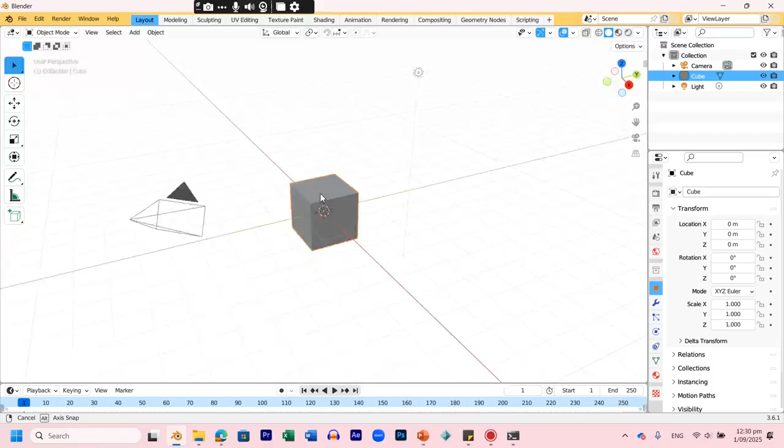Okay, so this is just going to be an introduction to the chess and wrecking ball project, and I'm going to go through this in real time in Blender of how you might like to approach this.

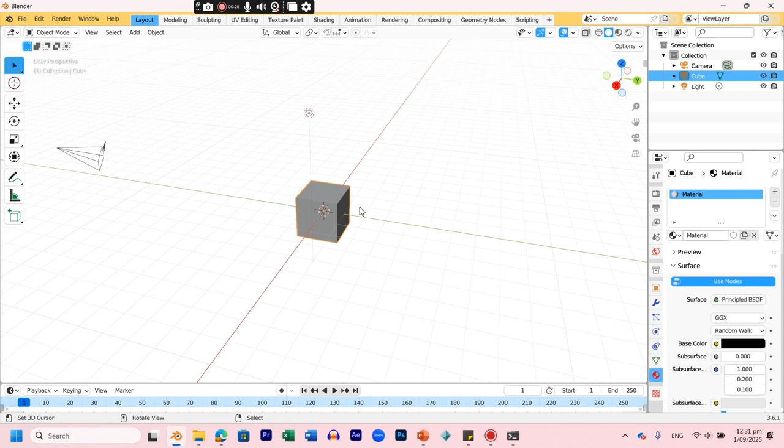You could actually start with the cube. To be honest, first thing we're going to do is change one into our color. I'm going to be boring and just go black and white. So this first one is going to be black. I can't see if it's black or white yet, but I'm in the wrong mode. But it is black. I'm going to look from directly above by pressing 7.

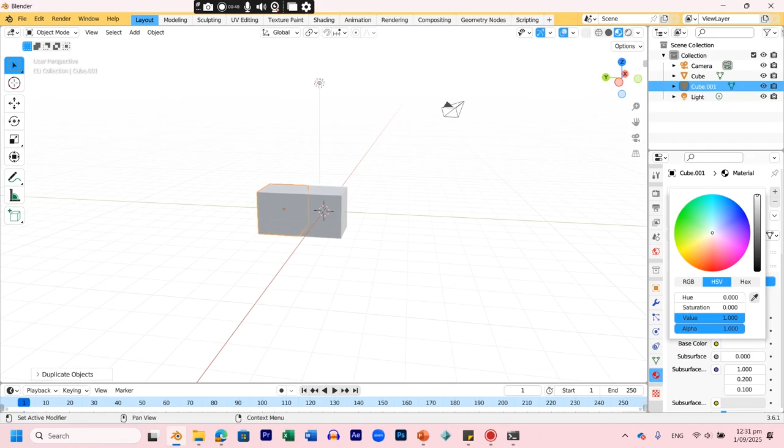Duplicate, and move in this direction, so it's just flush right next to it. Okay, so one's there, one's there. But this one I'm going to change to white. Now, if they change at the same time, it's quite easy to get rid of that - you just take that one off and then give it a new skin. There we go, one white, one black.

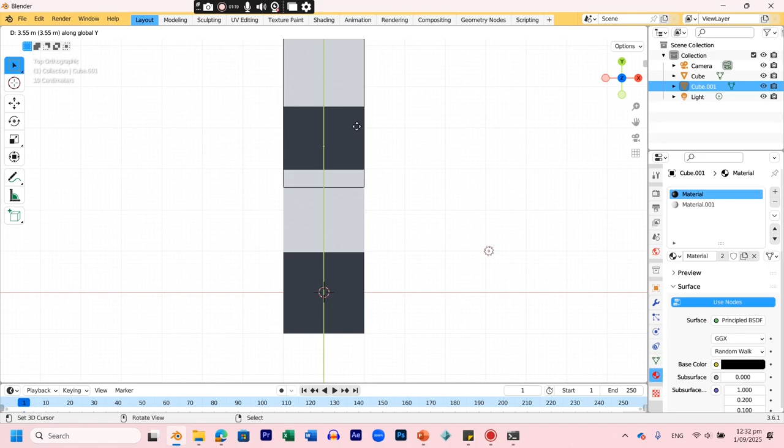Now, directly above, and all I'm going to do is join these two, Control J, or Command J if you're on an Apple, and then duplicate these two together, GY, just to move it very neatly in that dimension, and then join these ones, and then do that one more time, duplicate GY, and there we go - we've got a line, Control J, and that should be one solid object.

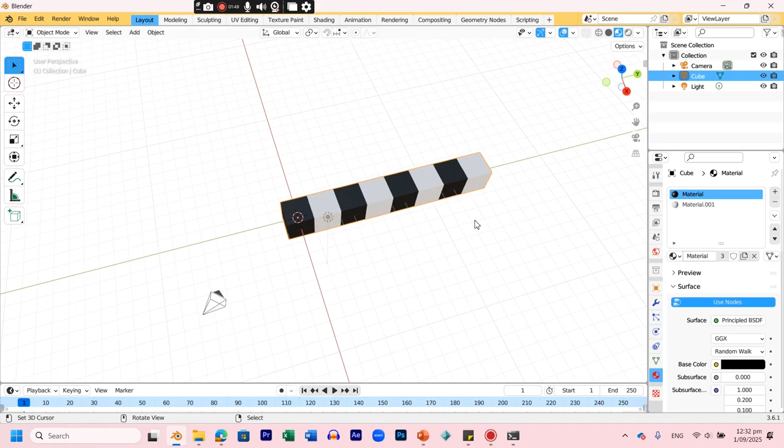Okay, now that's one side of the chessboard, and what I'm going to do is duplicate again. Oh, actually, one thing you can do - just looking from above, you see how this has got a center of mass right there. That's not really where we want it to be, so we're going to go Object, Set Origin, Geometry. There we go, that just moves the space to the center, which is what I wanted. We'll have to do that again when we're making the chains.

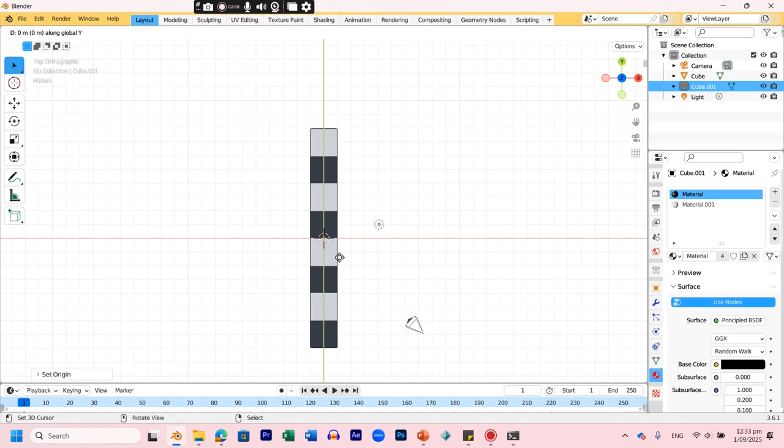And I'm going to duplicate this, and go GX - sorry, move it to the side very neatly. Now, obviously, white next to white, black next to black, that doesn't look like a chessboard. But because we start on black and end on white, it's an even amount of squares, which is 8. We need to go R180, and it's a checkerboard. I'm just rotating it.

Cool, join these two together, duplicate these guys, move this to the side, join those again, duplicate one last time, and we got ourselves a chess board. There we go. Now that's what I'm going to build everything onto. So that's my object - I could name this chess board.

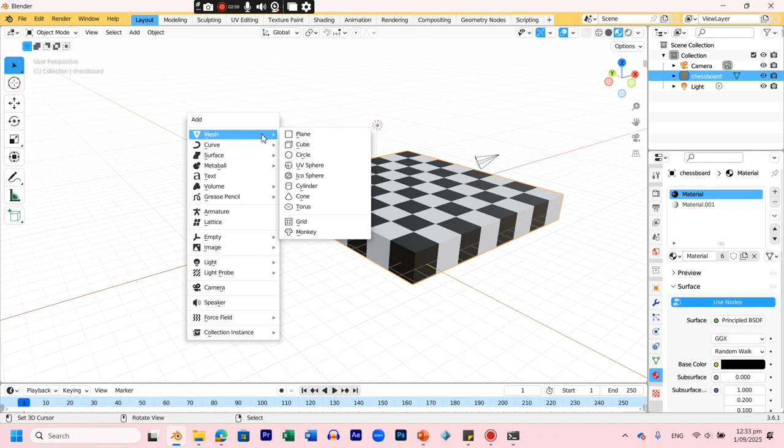And now I'm going to make my characters. So I'm going to start off with the pawn. I'm going to make sure it's the right size straight away, make sure it doesn't take up too much of the room on there. Perfect. Move it to the side and make it my center. Okay, now this is how we're going to make our chess pieces.

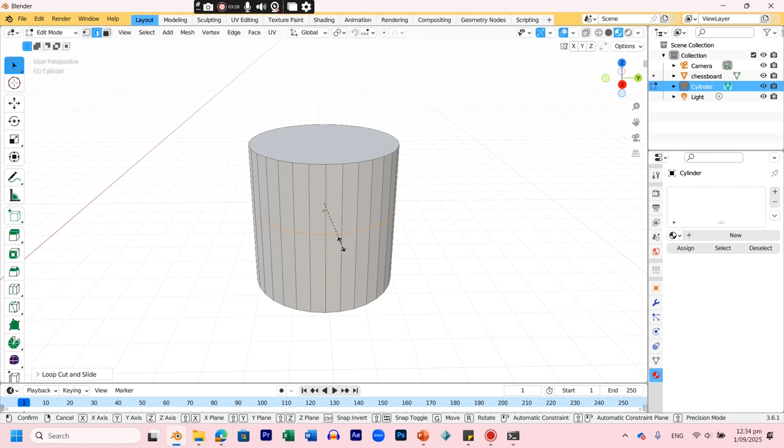We're going to go to Edit mode and go to Line. When we select the line, we're going to go Control R or Command R until we get this ring of influence. I'm going to click, decide where I want it, and change the size with S. Do this a bunch of times until it looks kind of fancy. Up to you how fancy you make them. I'm not going to go anything overboard, just change it a bit, just so it's a little bit more interesting than... there we go, that'll do.

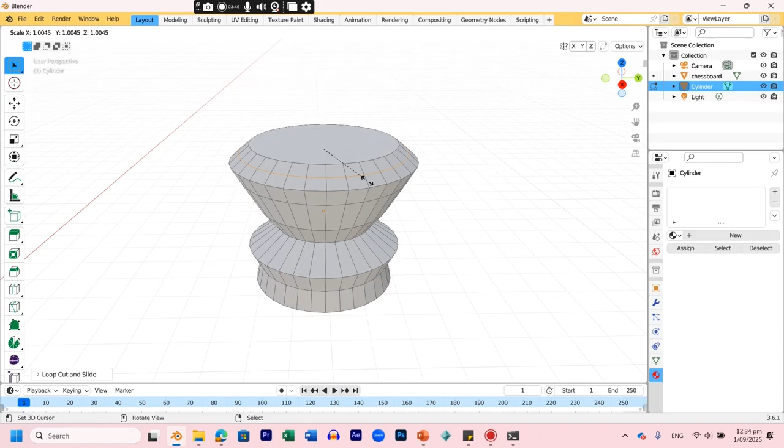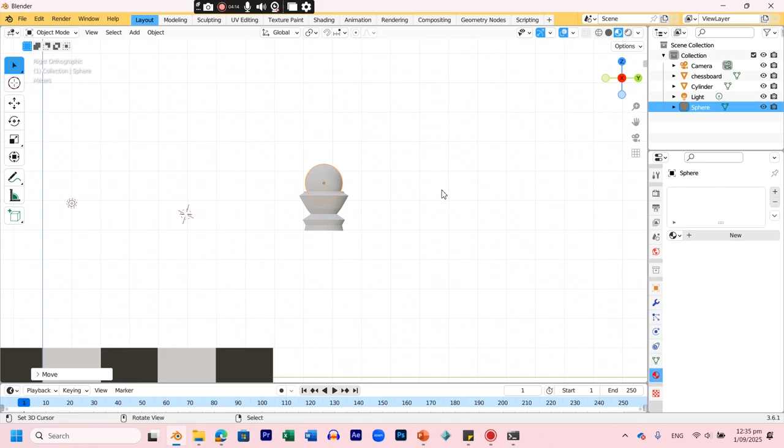And go back out of edit mode and into object mode. Look at it side-on by pressing 3. And I think I'll make a UV sphere, pop that on top and make it a bit smaller. Make sure it's directly above by pressing 7, and squish it down. Okay, let's have a look - does that look nice and neat? Looks pretty good. And then I'm going to join them, Control J - so that is going to be my pawn.

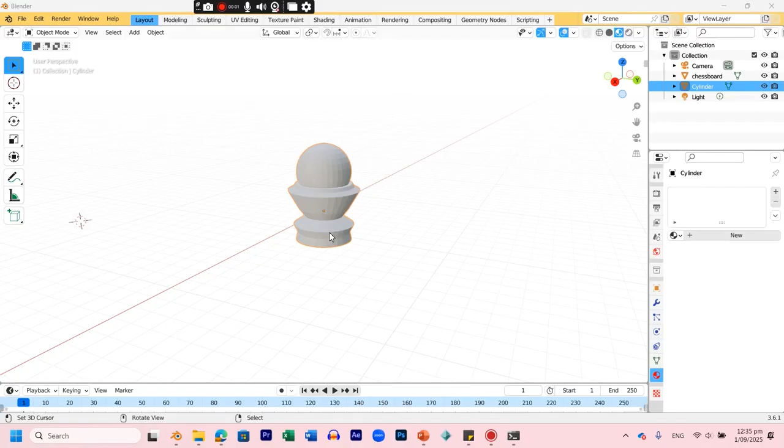Okay, so we're going to make a few more - we only need to make 6 shapes though, so that's a good start. So we're going to make a few more little characters here. I'm going to actually duplicate this guy, and in edit mode, go P to separate by loose parts.

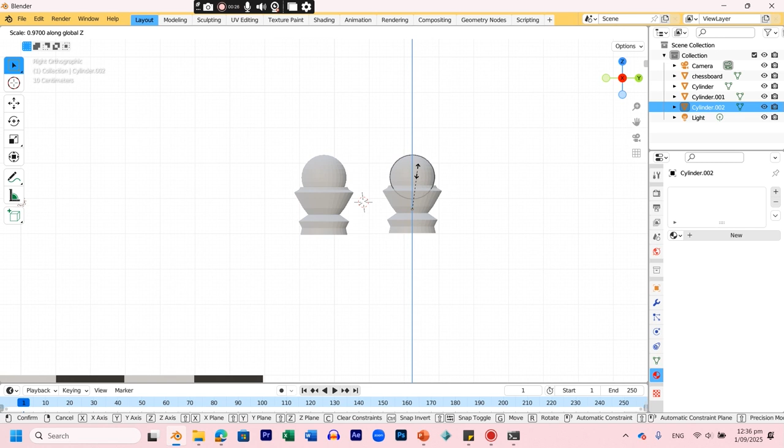And in object mode, I'm going to make this bit a little bit longer, so go SZ. I'm going to make another little blob on top, but this one's going to be very small. And this I'm going to make a little bit larger and a little bit longer, SZ. There we go. You can probably guess who I'm designing - it's the bishop.

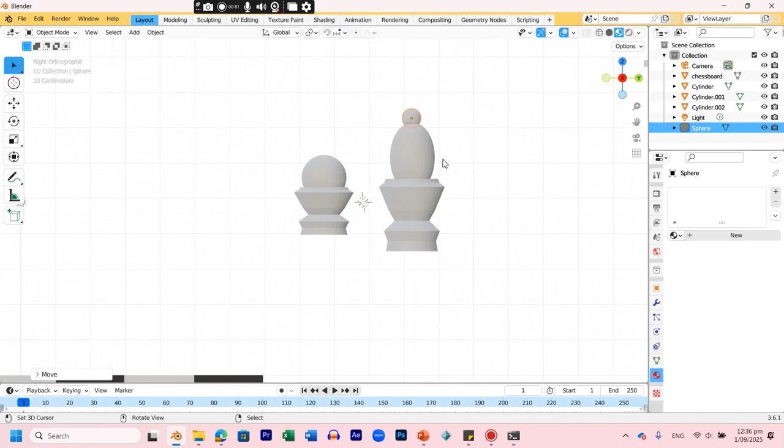Now what I'm going to do is use a different little trick with Boolean. I'll press S, Z until I make a little pizza box shape. That's good, just checking, and I'll grab it and put it at a nice little angle into the bishop.

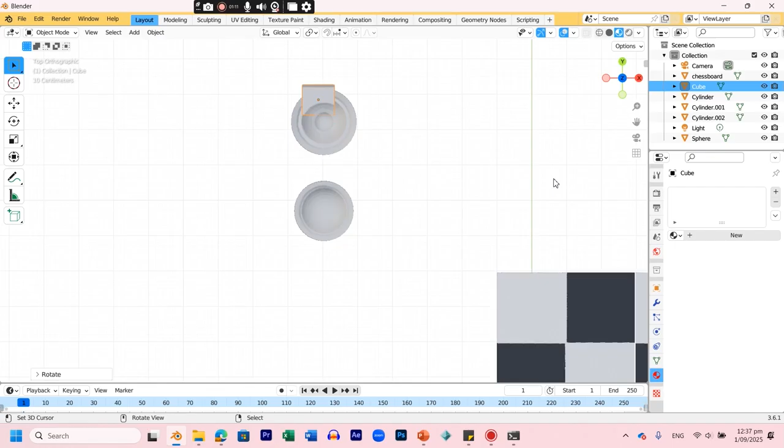Now I'm going to join all these bits together by pressing Shift and Control J. That's one bit. Then in the modifiers, I'm going to go Add Modifier, Boolean.

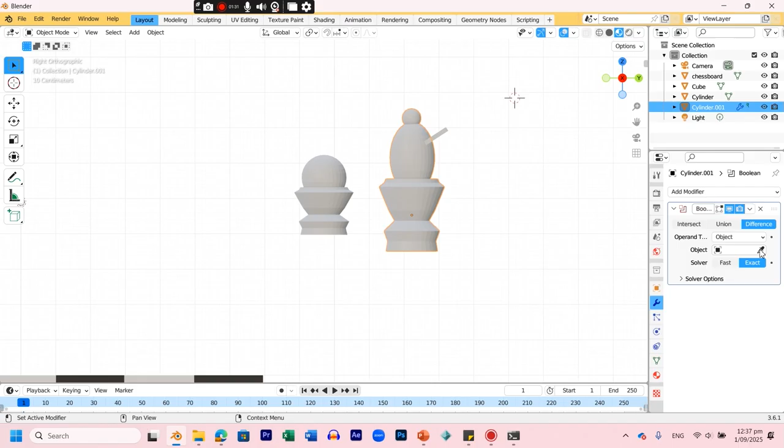So I'm selecting this thing I'm cutting, and then I select the thing I'm going to remove, which is this little object here. That's disappeared, but never mind, let's see what happens. Then I'm going to get rid of that, and I've got a little cutout. It also got rid of that little blob there, which seems to be a bit of a bug with the system, but I can fix that easily by making another one.

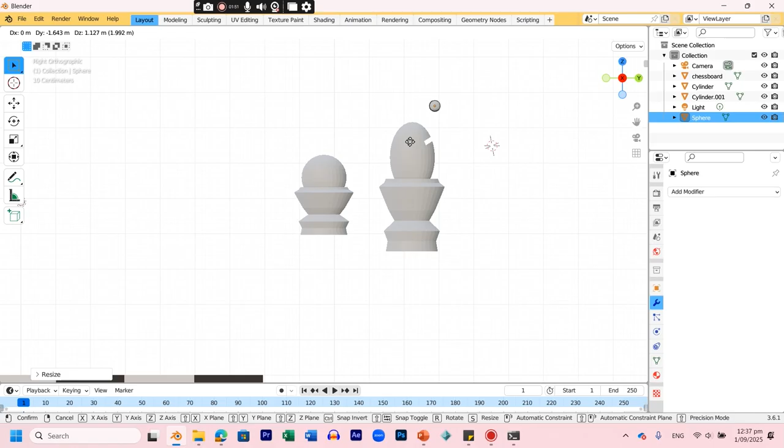So it's not a big issue. There we go, and then join it all together. And we've got a bishop. Now we need four bishops. Okay, let's make something else.

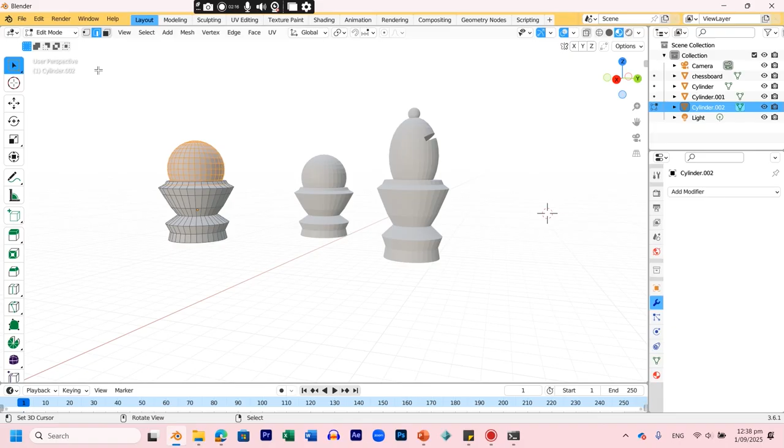I'm just going to duplicate this again and make it bigger. In edit mode, I'm going to press P, separate by loose parts. Then in object mode, that sphere is separated.

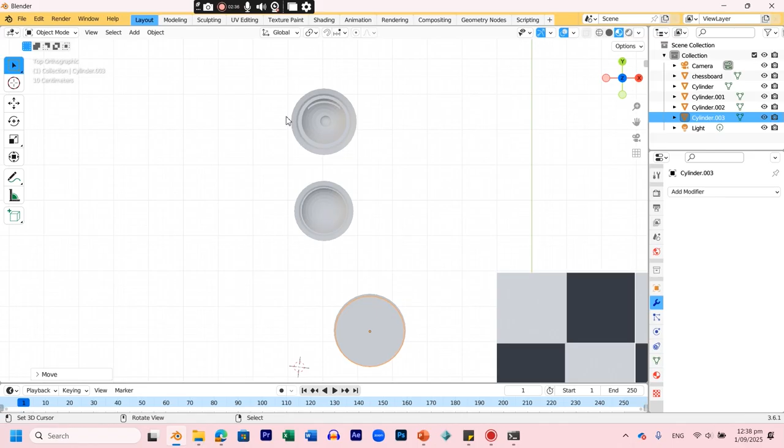Now I'm going to make another cylinder and pop it on top, making sure it's a little bit smaller. Move it down, maybe still a little bit smaller. There we go, perfect. I'm going to do the same thing I did when I started it off.

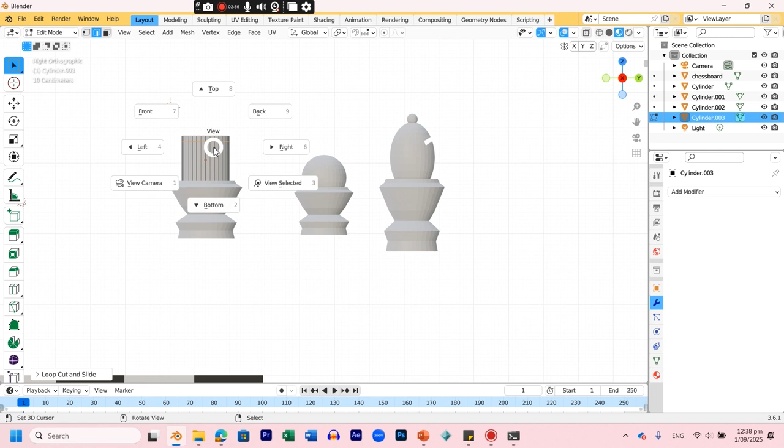So I'm going to go Control R, this right to the top, and put a little ring of influence there. Now it doesn't look like I've done anything yet, but I am, because then I'm going to go to face, choose the face, and make this small. You can probably guess what I'm doing.

Then I'm going to go D, Z, and move it down, kind of dragging it down. I'm only going to do it a little bit, and then do it again with S, Z. Is that going to work? No, I think I've got to make another ring.

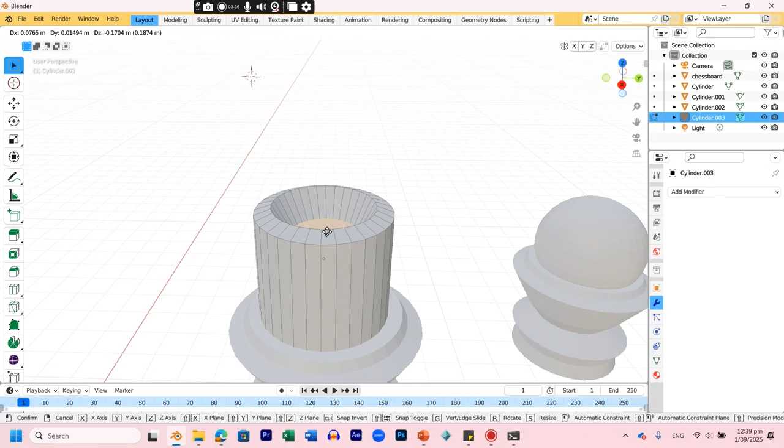And then, oh yeah, there we go, that's what I wanted to do. Back to faces, and then I'm going to move this down. Did I do that neatly enough? No, I didn't. There we go.

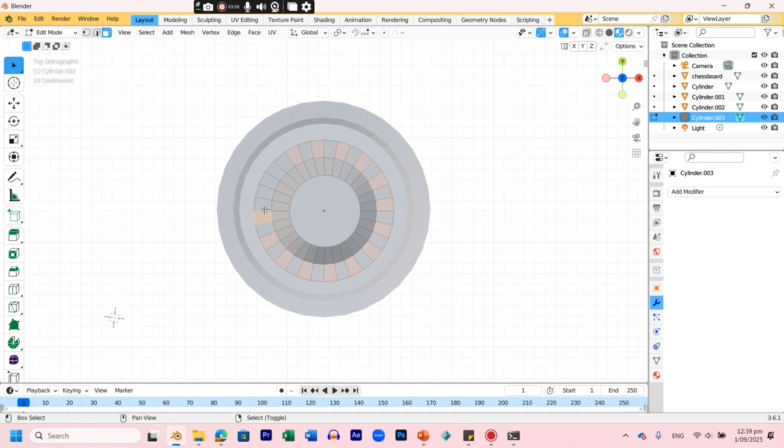Cool, now I'm going to make the rook. Looking from above, I'm going to use shift, selecting every alternative or every other space. Then I'm just going to go E to extrude and Z for the direction.

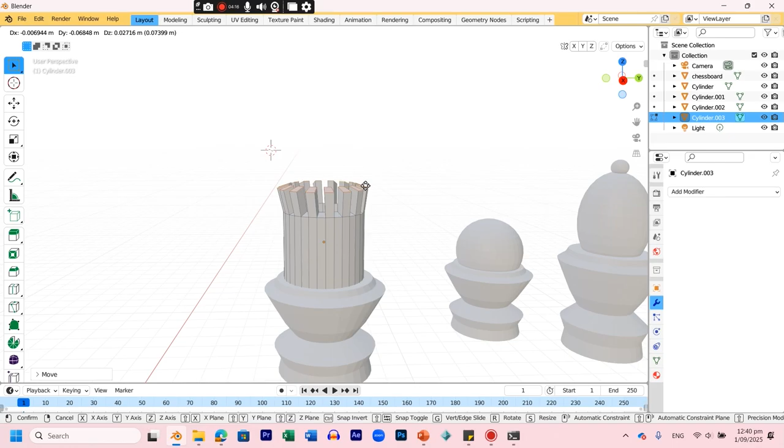I might just want to drag it out a little bit. There we go. Oh no, there we go, that's fine, it's a little bit wonky. There we go, there's my rook.

All right, I'm going to go back into object mode and join those bits. I'm going to duplicate this guy another time and make it even bigger. I'm just going to check that it's not too big for a second. Yeah, whoa, a little bit too big.

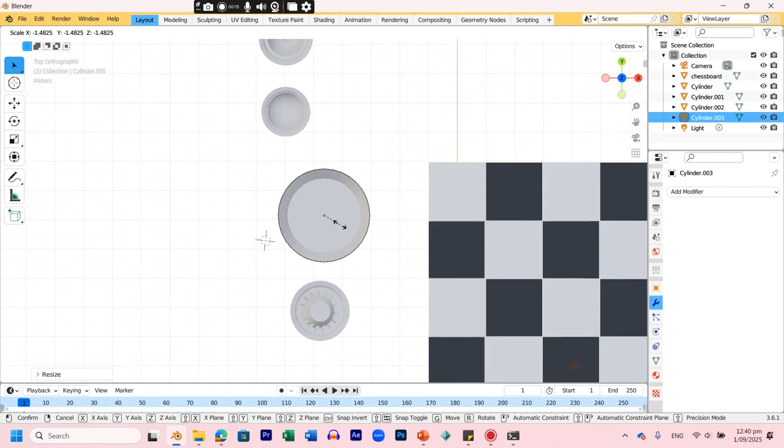Then I'm upside down, I want it to be... Actually, I might keep this guy the same size and make this one bigger. So what I'm going to do is change this into a queen by increasing the size of this and embedding it on top of the castle.

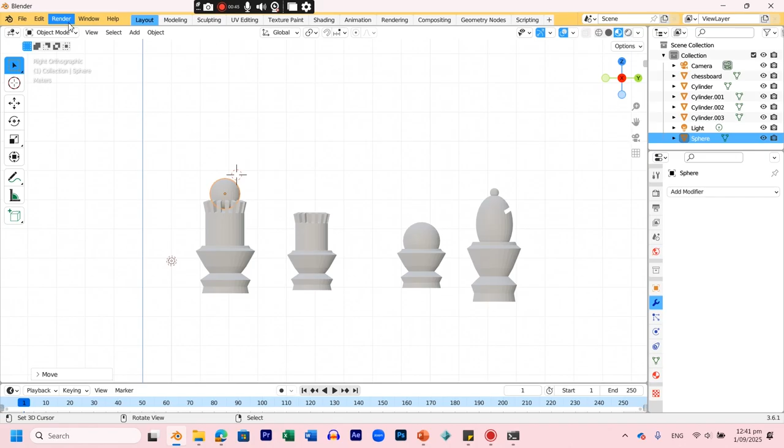There we go, and what could I do? You could be a little bit more creative with the queen. Let's think.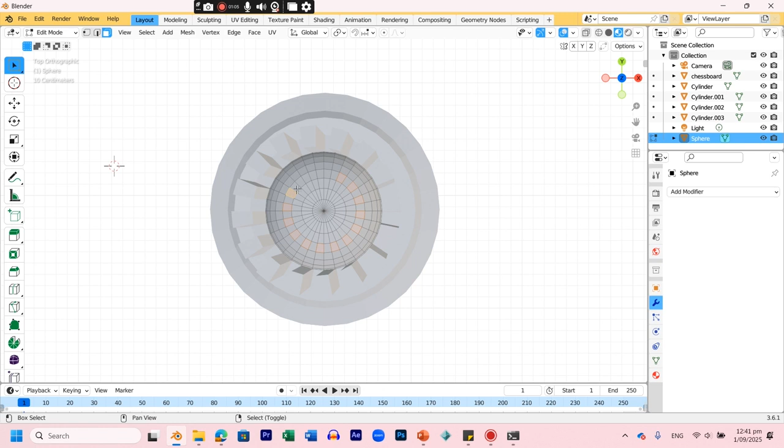I know, in edit mode I'm going to select these little bits and make a crown. It's very much the same sort of thing, but it's got a kind of pommel crown thing going on. A little play on E, up it goes. Yes, there we go, that looks queen-like.

A little bit boring, but oh, I know what I could do, I can add some other elements to it, just by making this change a couple of times to make it look fancy, just so it looks a bit different. And that'll do, cool, so there's my queen.

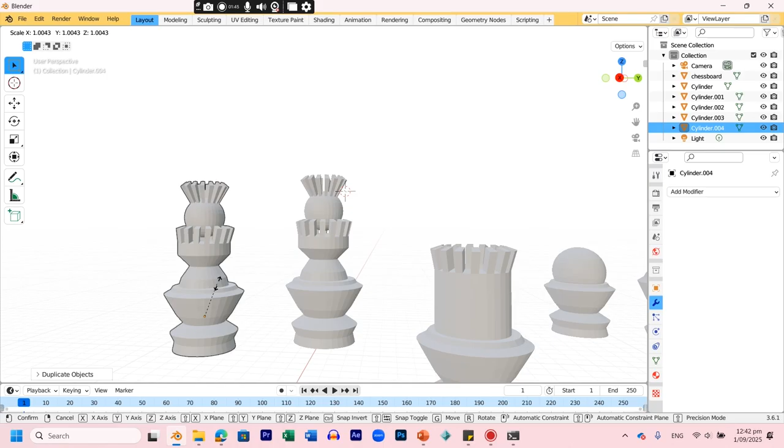I might take that same concept again, make it just a tiny bit bigger for a king, and then in edit mode I'm just going to select some of these things in X-ray mode. Get rid of that. If I look at it with that mode, there we go.

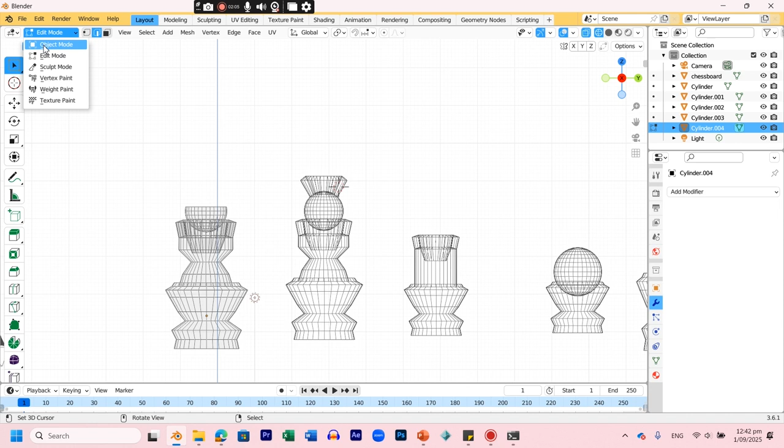And for the king, I guess I'll add a cone, make sure it's above, pop it right down there, and place it on top. I think what I might do is add just a cross, which is quite an old-fashioned sort of way to denote the king.

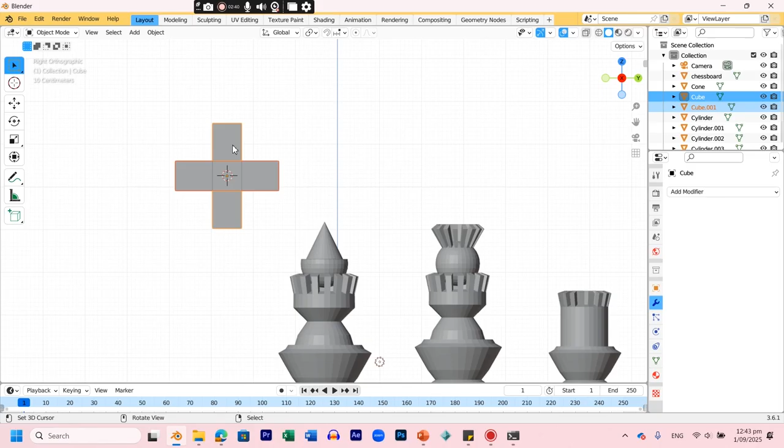S, Z, duplicate this, rotate 90, there we go, there's a cross. Then join those guys, make it really small, and just pop that on top.

There we go, and there's my thing. Cool, and the cone.

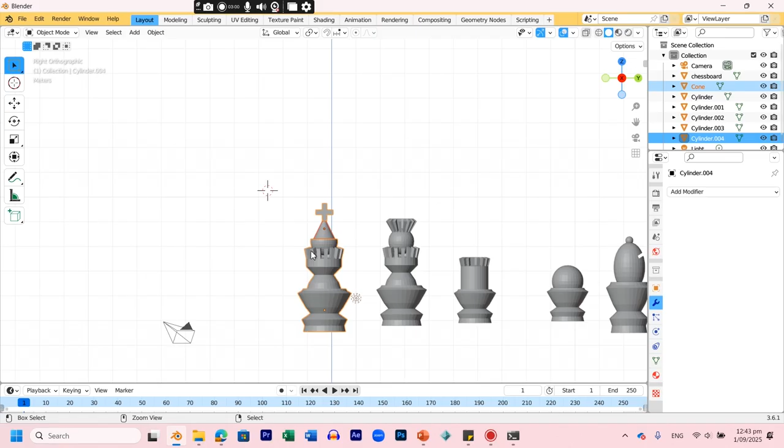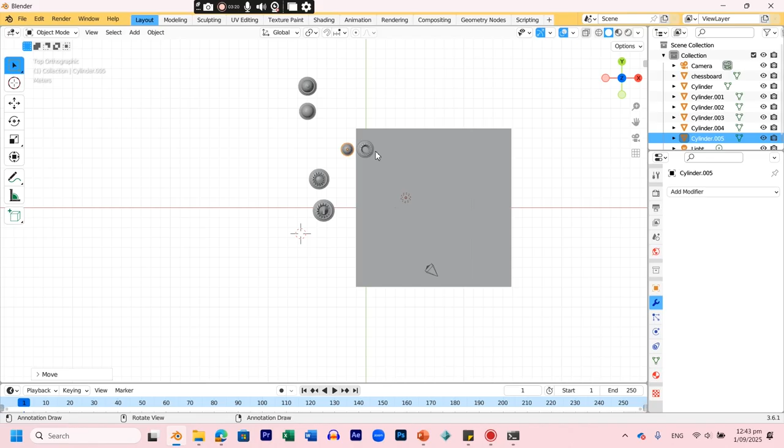So that leaves just one shape to go, and I think you all know what it is. It is the knight, so you need to make it look like a horse. We want it to be bigger than a pawn because it's an important piece, about as big as a rook I suppose. So just look at it from above and make sure you got your spacings right.

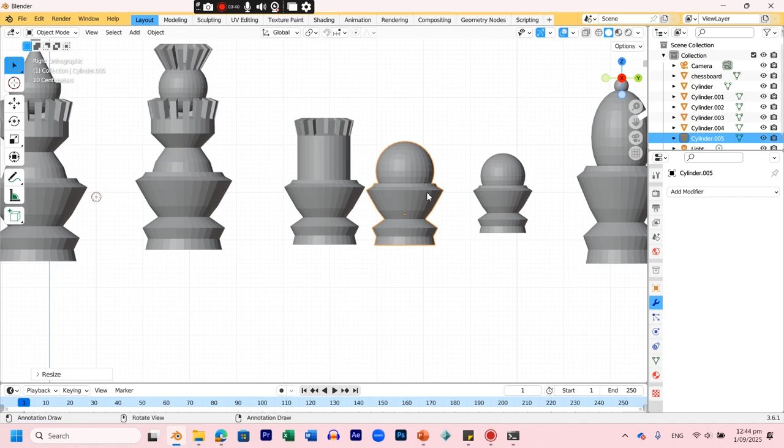Cool, looks fine. Oh no, it's smaller than a pawn. I'm going to make it bigger. Actually, I'm going to make the actual pawn smaller, and the knight a bit bigger. Now the knight's probably the hardest to do, so let's just concentrate on this guy for a second.

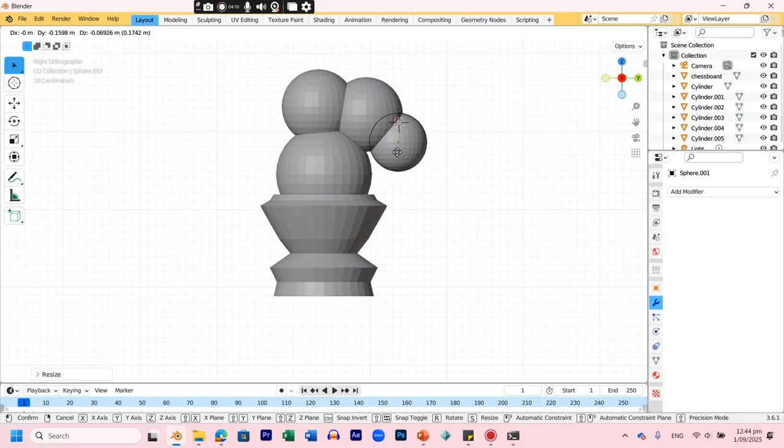What I'm going to do is add some extra spheres to him, on there, and another one kind of here, and another one kind of here. And I'm going to make this one a little bit smaller, so it looks a bit more like a horse. Okay, so that's just a general, very, very loosey-goosey, sort of like horsey, but it'll work for now.

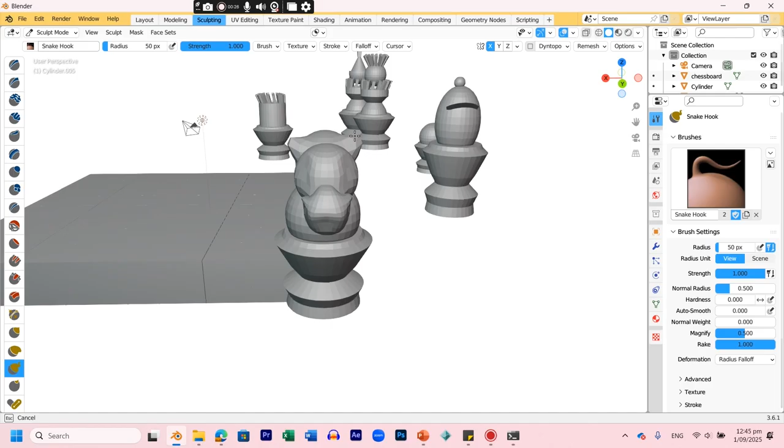Alright, so I'm going to go into sculpting. There's not that much to do, but what I'm going to do is make sure when I'm sculpting I have the X on, and whatever I do on one side, it'll do on the other. And it shouldn't take too long until we get something that looks like a stylized horse.

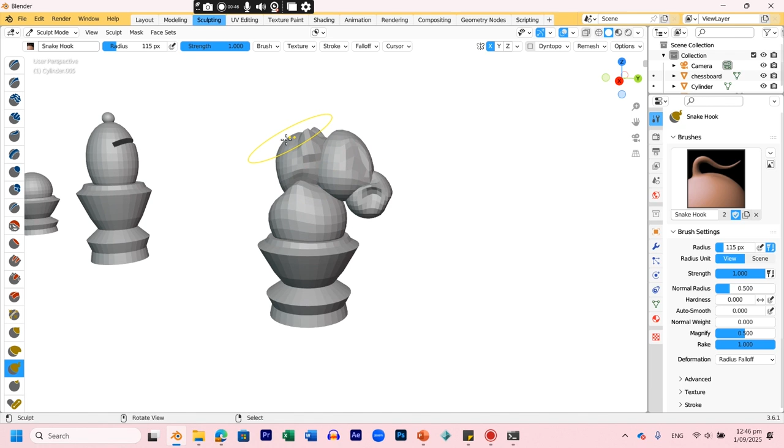Okay, make some nostrils, and that's not bad. I'm going to increase my radius now a bit, so I'm changing a larger portion of it together in one go. I like this tool, but it's not exactly subtle. The smaller the radius, obviously, the more pointy your effect will be. If you want to make really pointy ears, you can use other tools, changing the radius or changing the strength and other things to really make something that looks quite cool quite quickly.

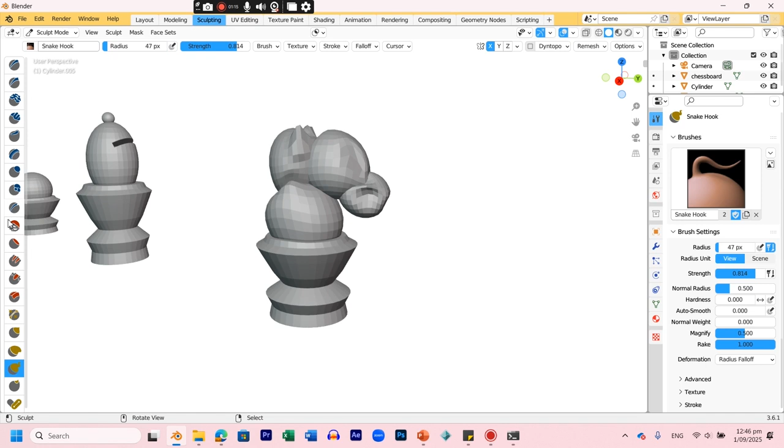Now I'm nearly happy with that. Maybe a little bit more ears. It's got kind of ears, it's got kind of nostrils, that'll be fine for me. Now you can spend a long time improving this by changing your radius and your strength and the tool, and a lot of other things.

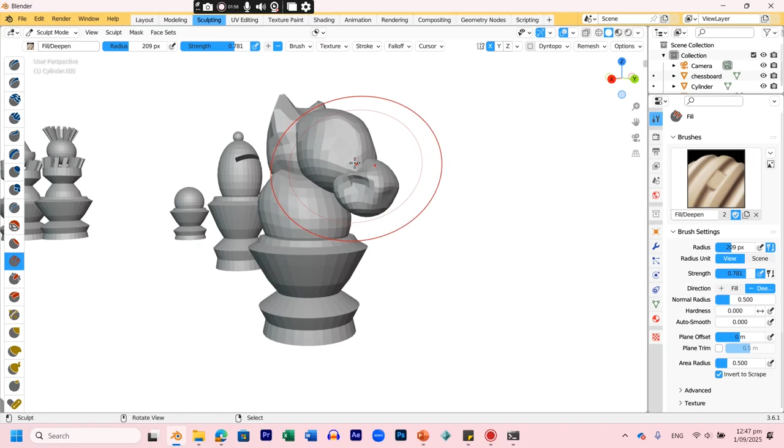But you also need to know when to stop, if you know what I mean. Sometimes you can get something that's looking pretty good, and I think it's more important to know when to just call it a day and say, okay, I think that's looking okay. But some of them have got a positive and negative, and what that means is, see how that's kind of pushing it down? That's okay, but you just got to be careful with the radius. Yeah, high strength, small radius is like a knife.

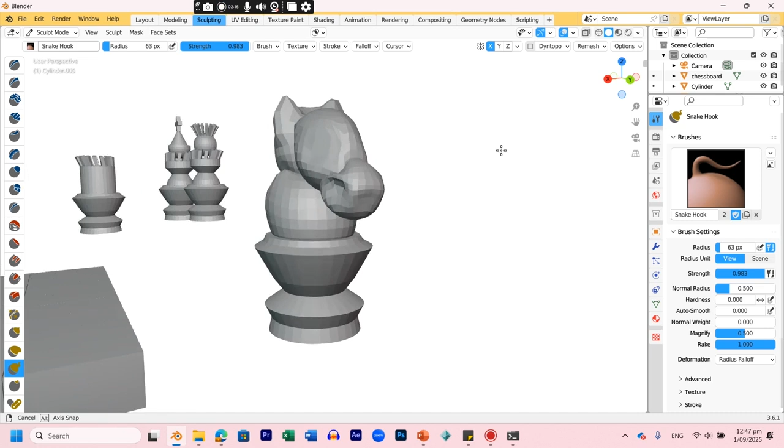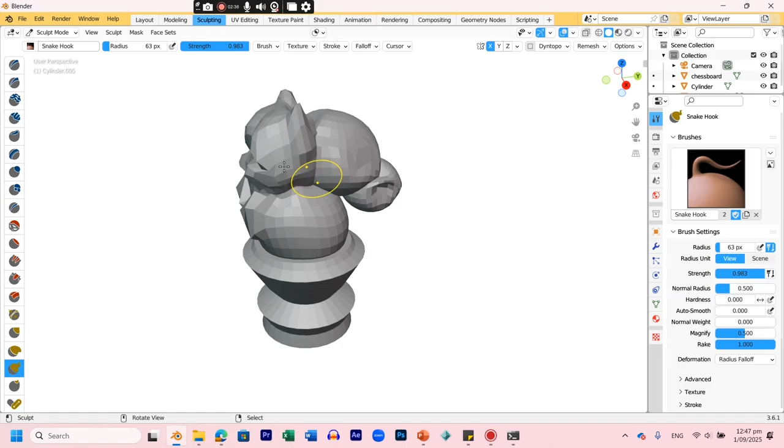Okay, it's looking okay, that'll do for me for now. You could make it look better if you wanted to, of course. Some people certainly have. Oh, don't know what I'm doing here. Oh, I was trying to make a bit of a mane. I don't know if that's working or not. Oh yeah, it's alright, there we go. It's a stylized horse, that's fine.

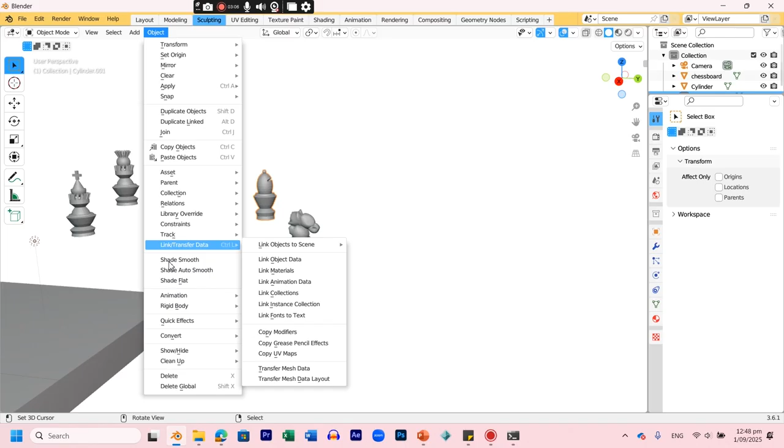Cool, so I'm going to go out of sculpt mode now. Now I'm going to look. So I've got 6 pieces now, don't I? Yes, so I've got a king, a queen, a rook, a pawn, a bishop, and a horsey - I mean a knight. Now what I suggest you do with all of them is go into Object and Shade Smooth, and they'll look just a little bit better if that's the kind of look you want to go for.

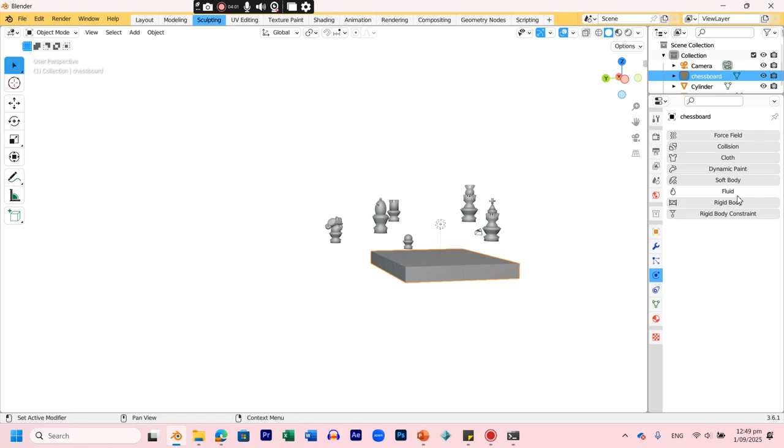Right, so there they are. And what I'm going to do now is, before I do anything, I'm going to give them weight and go into physics, go rigid body, convex is fine, and I'd make them 0.1. Rigid body, 0.1. All right, cool, and make your chessboard rigid body passive. And you can just press play and everything should fall. Brilliant.

So now they've all got weight, I'm going to position them where they should be. So the pawn is going to go there, and I need 2 of those guys. I'm going to copy those 2 to make 4, and I'm going to copy these ones to make another 4. And I'm going to duplicate 1 and just leave it over here, and I'll tell you why later.

What is that? Oh, that's the rook. That's going to go here, 1 here, and this guy's going to go here. The bishop is going to go here, here, and here. Queen is going to go here, I'm going to go here. King's going to go there. Oh sorry, the bishop goes next to royalty, doesn't it? And the horse - I mean the knight - we'll go here. Facing the wrong way, but never mind.

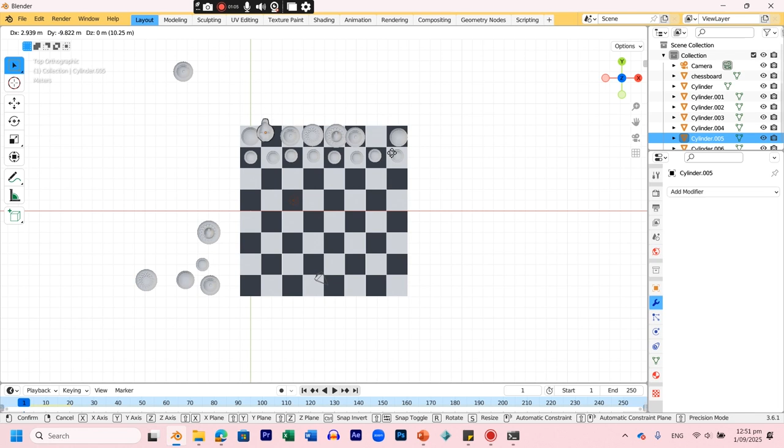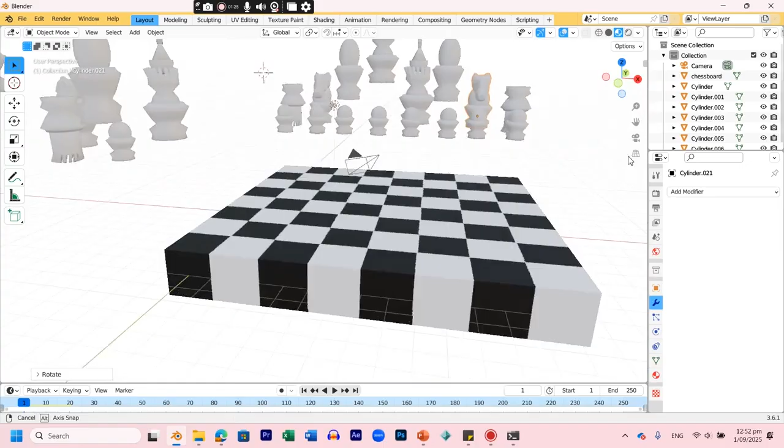I might turn this guy around. 180, there we go. Who's facing the right way? 180. And now let's just have a close inspection. Now I put the rook upside down because I did something wrong with the modeling, but let's just see if they fall. Oh, everything falls. What did I do there?

That should be passive. Let's try that again. Ooh, everything stays just right. Now it's a bit of a wobble. That's fine. Ooh, the queen's really wobbling. Let's see where her center of mass is. Oh no, that seems to be okay.

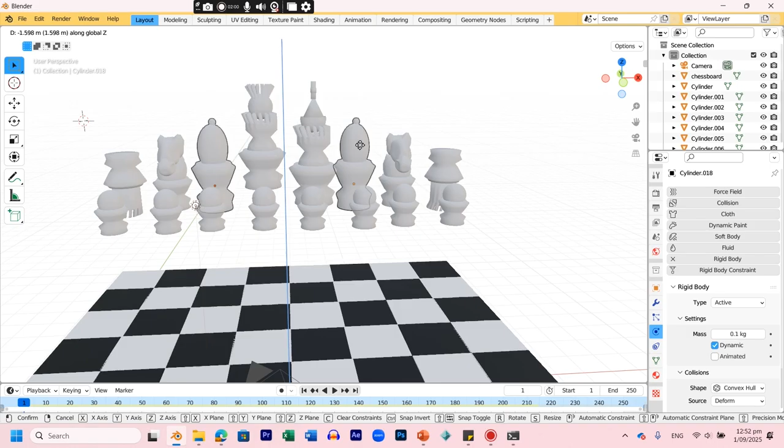No, I just think it's more to do with her being too high up. And I think the bishop could come down a bit as well. So let's play and see if they land. Oh, they topple. Now what's happening there? I think that the bishops are too small—I mean too big, I should say. And if I just look at them like that, yeah, they're just a little bit in the space there.

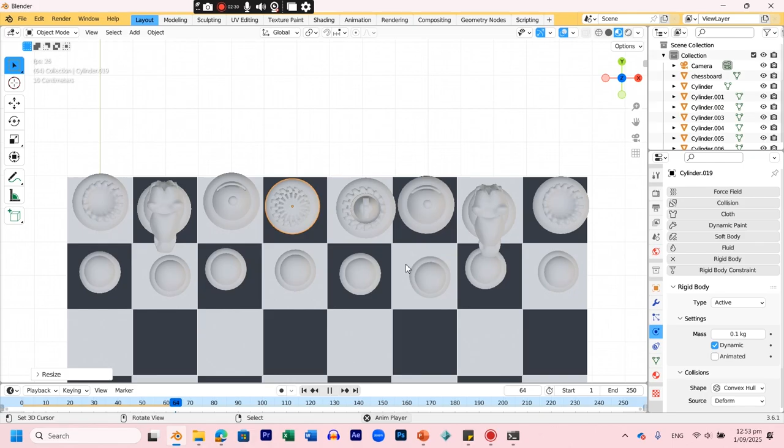And the king's got to be a bit smaller as well. Yeah, and the queen's got to be a bit smaller as well. Alright, let's play it again, see if everyone lands okay. Beautiful. Okay, cool. All right, now it's time to make the other team.

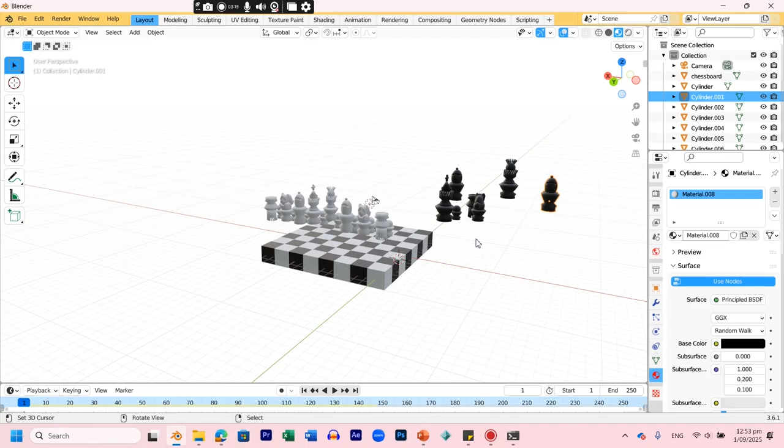Now, they've fallen through, but that's because this is going to be the black team. So I'm going to go over to here, and I'm going to go into here, and just go black. At least we've all got white. There we go. All right, now let's position the black team.

So the royalty is going to go over here. That's too big. Bishop's too big, never mind. These facing the right way. And we got our rooks.

And finally the pawns. So pawn one's going to go here now. That's going to go there. Choose two of them, duplicate to get 4. Select all 4 of them and duplicate to get 8. Oh, this guy's coming off the board.

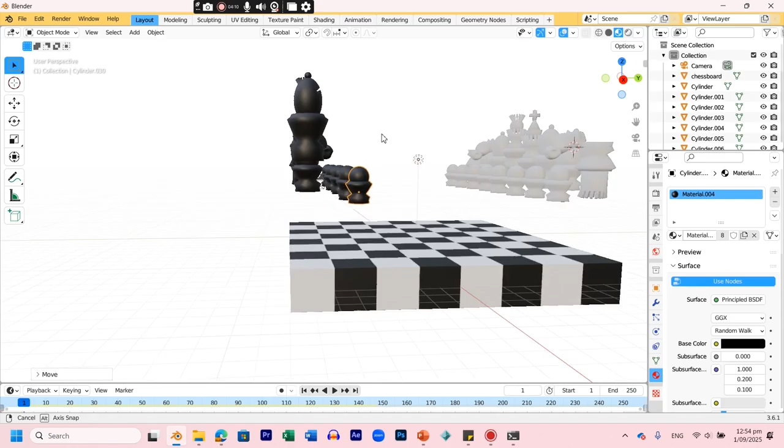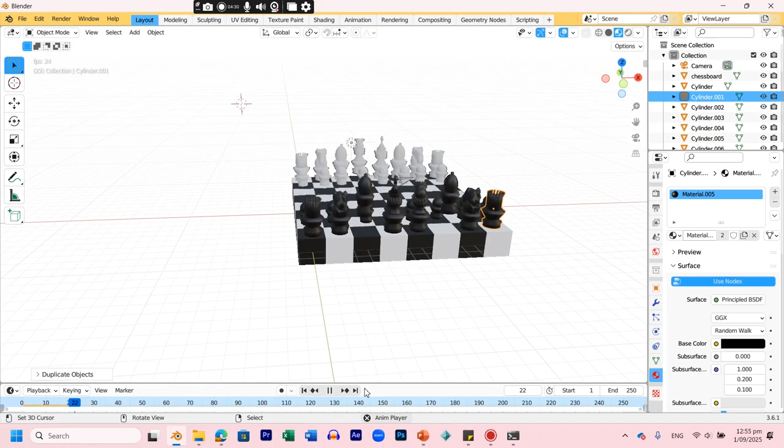Here we go. Now, black team's too high up, so let's move them down. Oh, hang on a second. Have I? Oh, no, that's wrong. I need one of these guys. Copy the wrong type. And let's see if they fall and land. Oh, so there we go. Everything is landing, everything is looking good.

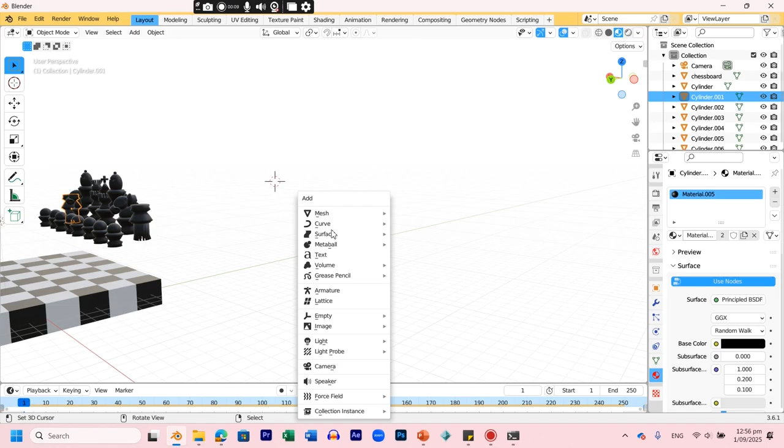Now it's time to add the chain. Right, that's looking good. Right, so let's just go over to here for a second and make ourselves a torus. Let's look directly down on the torus. There we go. So here's what we have to do. Now, that's when you really need to follow the instructions in order to get the desired result.

You go into edit mode, and we go into X-ray mode. Select half of the torus. Okay? Ooh, that's not exactly half. There we go, that's exactly half of the torus. And you go E, not that direction, but—no, don't want to do that, sorry. E, Y—oh no, X. There we go.

Cool, so that's quite a long chain. And we can go out of edit mode. We don't need to go into edit mode again. Now you notice this little center orange dot, that's its center of mass. It doesn't have to have any mass, but if it did, it wouldn't be in its middle. So we go to Object, Set Origin, Geometry Origin. There we go, and now it's in the middle.

Now let's give it some weight. It's rigid, it's active, but we don't want it to be that heavy. 0.2 or 0.3 even, fine. And the shape we need to change from convex to mesh. And let's just see if it falls. It does. Okay, cool, so it's real and it falls and it's got weight.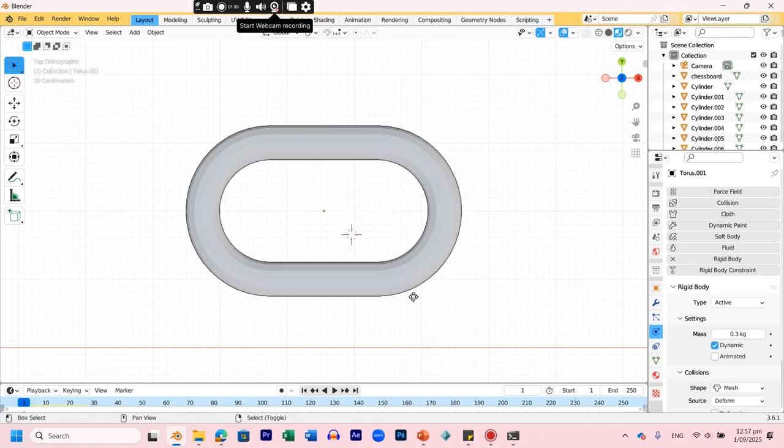Now, what we're going to do is look at it from above with 7, and we're going to duplicate them and move it off to the side. Now, we can't have 2 chains in the same place at the same time, otherwise they explode. But what you can do is look down it by pressing 3 and go R90. Now they're not pressing onto each other. And just check that they fall.

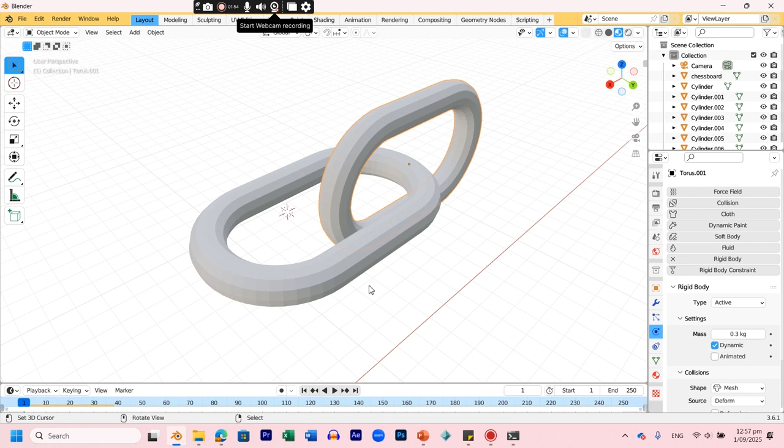And they do, brilliant. Okay, back to the beginning. Now look from above again. Select both of them by pressing Shift and go Shift D until you get 4 of them. Select the other 2 until you get—oops, I didn't do that. Right, and then that one and this one and that one by pressing Shift and Shift D. And you've got 8 of them now. I'm going to make quite a short chain and just check if that falls, and it does.

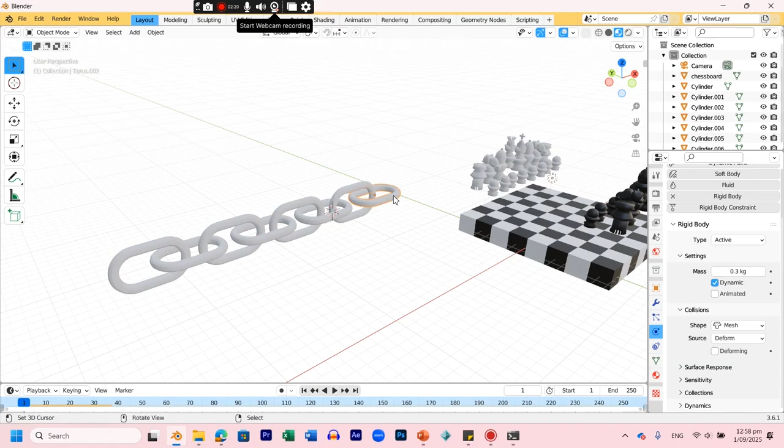Brilliant. Now, one of these chains I'm going to change from active to passive. Let's see what happens now. It swings. Oh, it worked. And at the end of this, I'm going to do the demolition ball, which will cause the chaos we want.

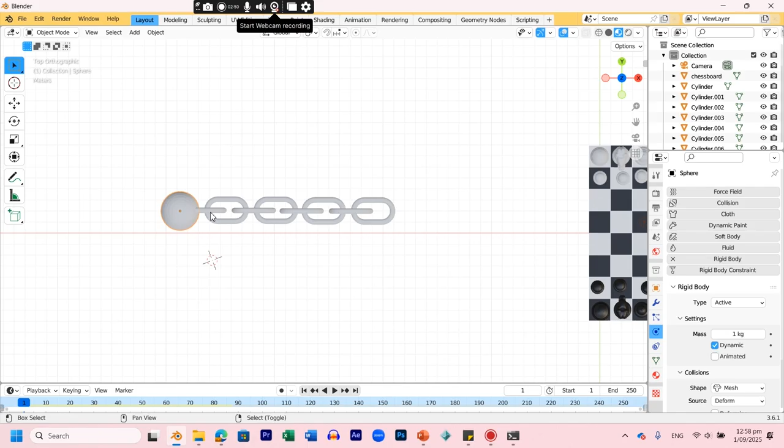This is going to be rigid body, 1 kg, and it has to be mesh as well, and it has to join itself to that last chain. Control J. Let's see if this works. Bang, it certainly does. Okay, cool.

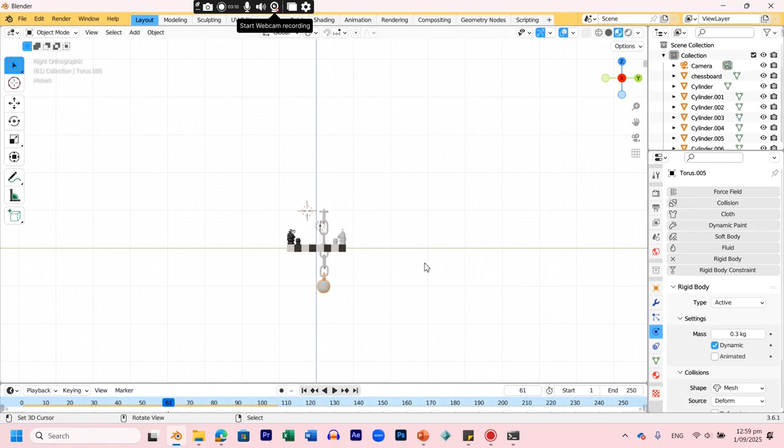Now what we want to do is go back in the timeline and see how far that swings. So it swings one square up, doesn't it? So basically what we want to do is move this whole thing up by one square measure.

Easy, up to this one. Let's see if it's smashing at the right spot. Cool, and it's just a little bit too low, so just bring it up a bit more.

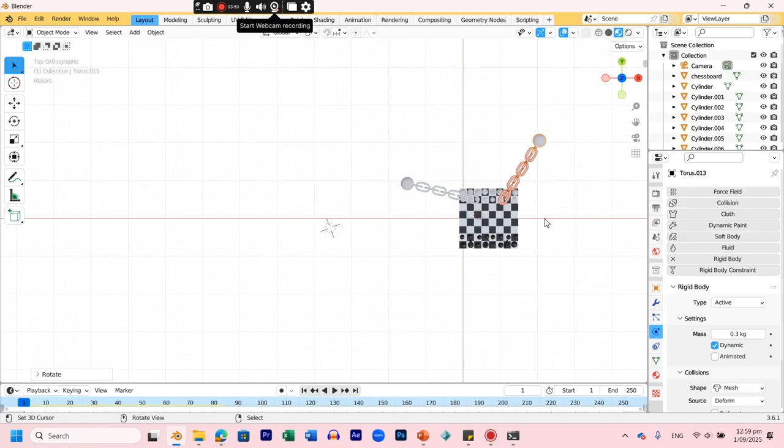Perfect, okay cool. Now we're going to move it into position. I'm going to move it across here, and then just a slight angle, and that's great. Then I'm going to duplicate this guy and have another one coming in from about this angle, and duplicate one last time across like this. Now that should be pretty good. Let's have a look at how this looks.

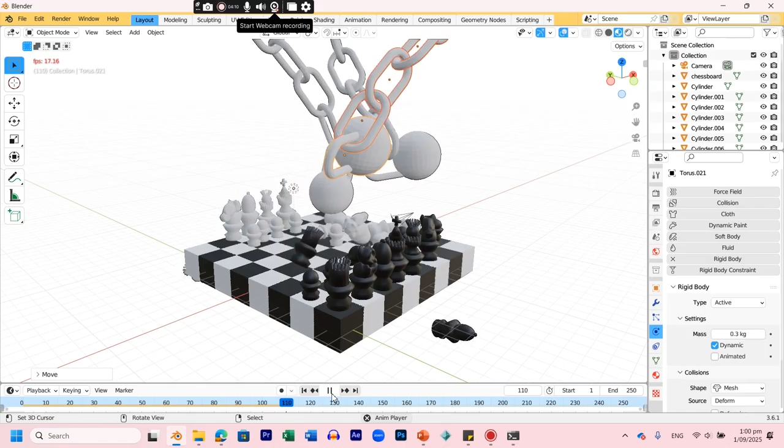Okay cool, it smashes stuff. I think if it was a little bit higher, all of them, it would actually create more chaos, so I'm going to do that.

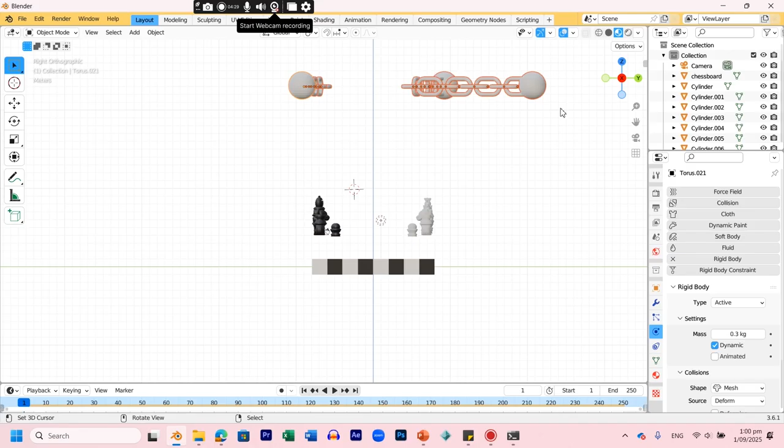I'm going to choose all my chain balls. I'm going to GZ just a little bit, and I think that's going to cause even more destruction. Let's check. Yeah, it does. Okay cool, all right, last step now.

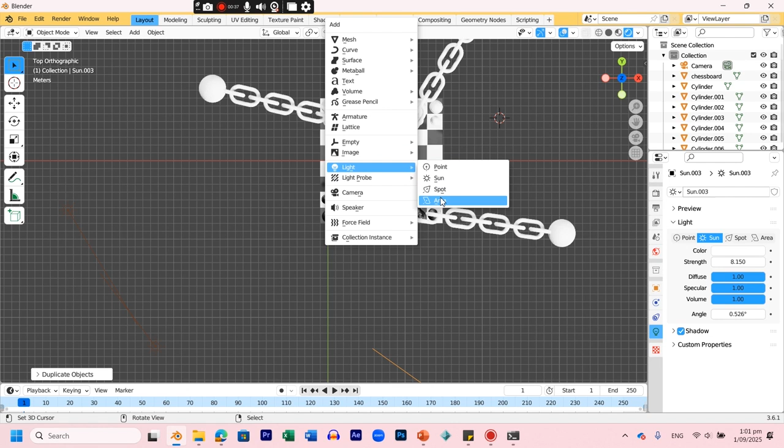I'm just adding some light, and then I'm going to set up the camera. So the camera view at present is that, which is terrible.

Let's see where that camera is. Where is that camera? Click on the camera. No, it's there. Rotate that camera, let's see what it says.

Okay, so that's an interesting view. It's okay. I think it's good to go back a little bit more. Let's see what it says now. That's an interesting view, okay.

It's probably, if anything, a little bit overlit, but let's make it more kind of here. Cool, all right, so that's a good starting point.

Now what I'm going to do is animate the camera. So in this little view here, I'm going to start here. I'm going to set this location at time frame 1, and this rotation at time frame 1 is where I want it to be.

I'm going to set it playing. I'm going to stop it there. I'm going to move it somewhere else now, maybe over here, and change its rotation. Let's see what it sees now. Well, that's quite a cool view.

And then I might just move it a little bit so it sees a bit more of the white. There, so at frame 1 it does this. So I'm going to click, click, click, click, click.

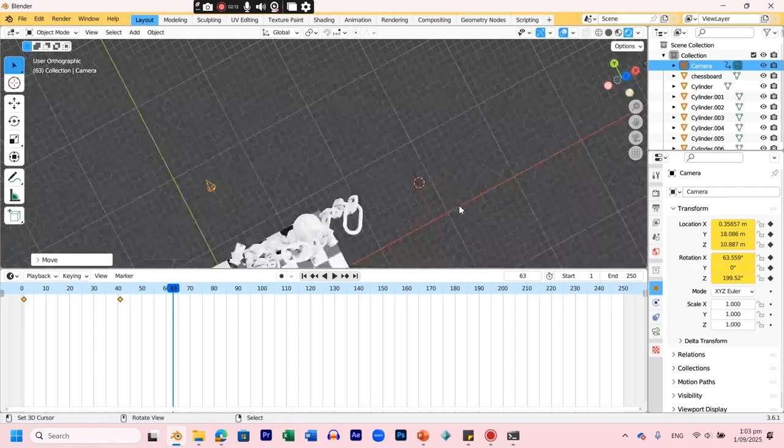Keep playing it through. Now at that point of impact, I'm going to move it once again. I'm going to move it along here so it really looks down the line.

And concentrate on that smash right there. Okay, click, click, click, click, click, click. Keep playing it, let's see what else happens.

All right, at this stage I'm going to move it somewhere else, bring it around to here maybe. Oh, that's a bad view, but maybe more of this would be interesting. There we go, and cool.

And then keep playing. Maybe I'll do one more position because things kind of calm down after that stage, so I might do something a bit more interesting. Just at frame 250, or maybe just a bit before that so it stays still, maybe 230.

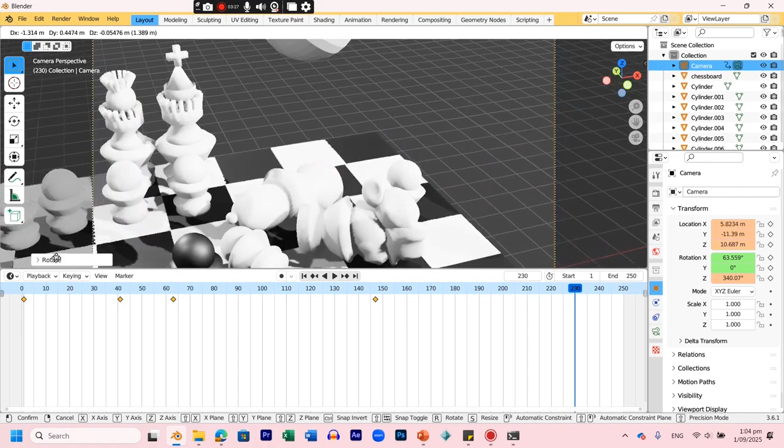Get that camera, move it around to here, rotate it into here. There we go, that's a cool last shot. And click, click, click, click, click, click.

So let's just play it all the way through twice from the point of view of the camera. Smash.

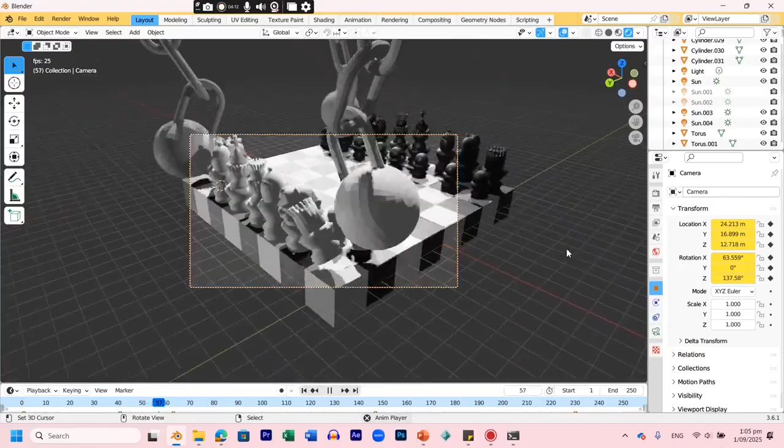Okay, so the last thing I'm going to do is go to the camera. I'm just going to bring out the view just a little bit because I can see more going on if I decrease the focal length a little bit. There we go, that's a bit more interesting. And that's all there is to it.